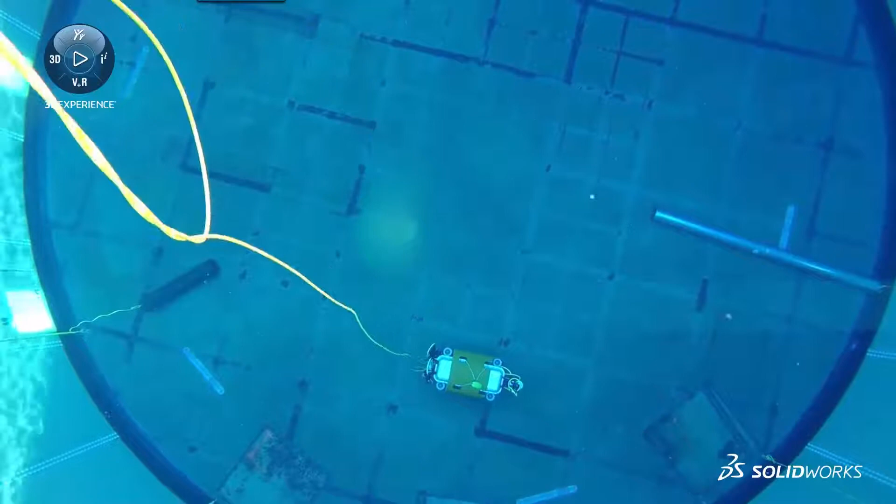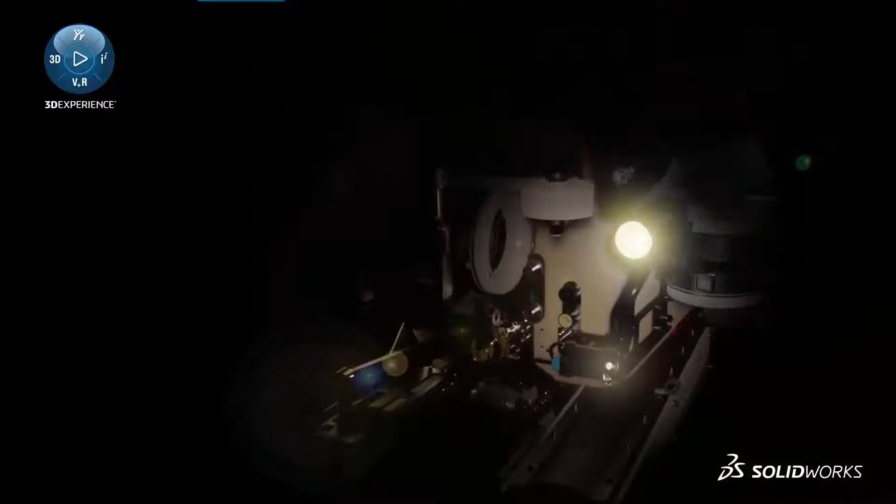By being able to use robotics for this task, they have reduced costs for their customers while improving accuracy. Their design is focused on safety and reliability for these unique environments, providing maximum uptime and allowing inspections to take place when and where humans would have to otherwise wait for the tanks to be empty.

Founded in 2016, Square Robot chose SolidWorks and eDrawings as their go-to design and management solutions. It was critical for them from the start to have the ability to work from anywhere combined with best-in-class design tools.

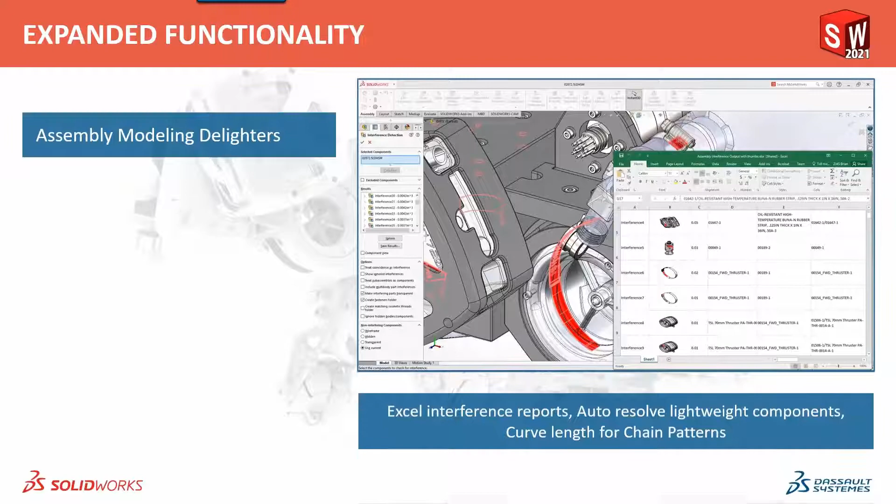When we get into large assemblies, which is just, it's not going away, right, everyone? Large assemblies is probably here to stay, and it's only going to get more intense. So we have some options that we're going to show you to defeature these models to simplify the information that we see on our screen. This is a huge issue today, so I imagine many of you will find some benefit to some of these tool sets that we've added in.

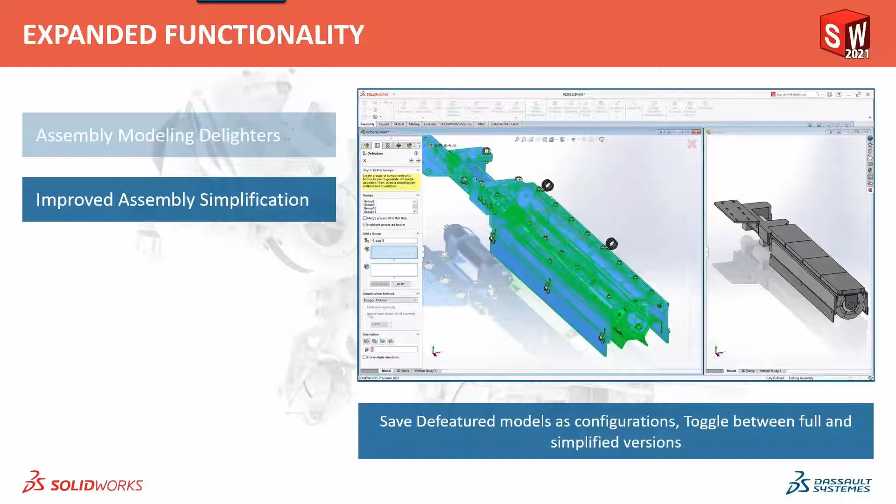When we get into sheet metal information, of course, can't forget the sheet metal people. It's a more flexible design. We have some really neat edge flange options - a lot of these things you probably could have created previous to 2021, but it would take 2, 3, or 4 functions and some real challenging brain time. Now with edge flange, we're able to just select some faces and edges and really create bends to these sheet metal components.

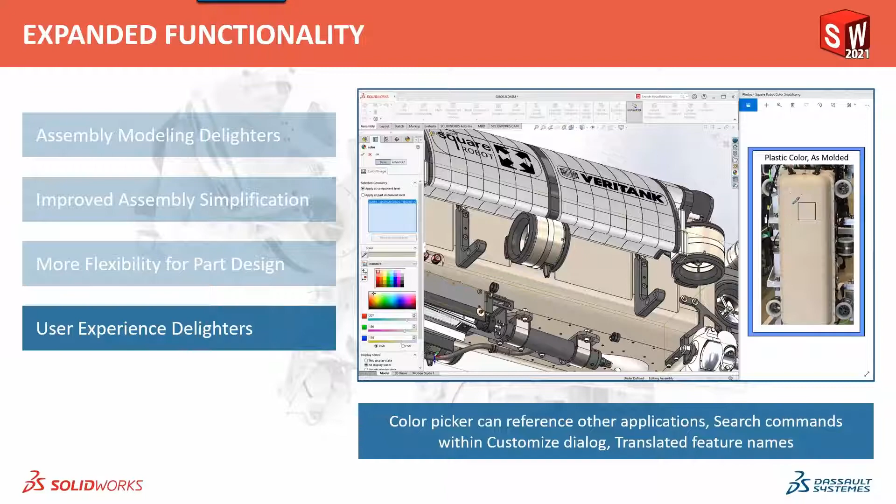As always, we have to keep you guys happy. It's not just about what we're manufacturing and how fast we get to a drawing - we're using this every day, 6-8 hours every day of our life. So Solidworks development is well aware of that, and they've added some user interface things that help us navigate through our model a little quicker. We're also going to discuss how to get coloring applied to your part. That's always important, and it's more important now than ever - we get 3D printed parts with textures associated, so we really have to tighten up our game on the aesthetic value of our models as much as the modeling itself.

One of my favorite things added this year is an improved mesher. We talk about meshing when we talk about simulation - Robbie Hoyler is going to take you through this a little more in depth. For those of you doing simulation, I think you'll find it to be an awesome benefit, and I'm really looking forward to having this capability.

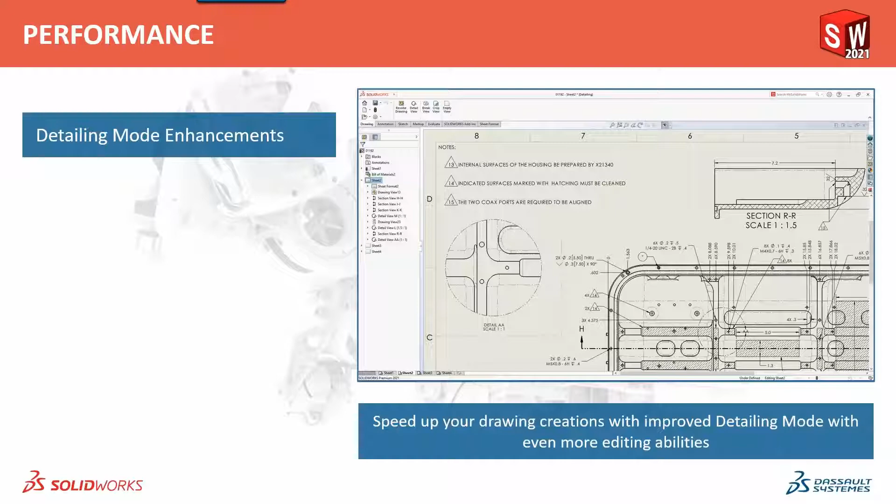So that's kind of our overview on the functionality. The next thing is performance. It ties into those large assemblies I mentioned earlier, but we can't forget our drawings - these detailed drawings aren't getting simpler or easier, less information, they're getting more complex. So we have some options to get us into these drawings a little quicker, get us working a little quicker while this is calculating in the background.

We have some options here for simple things like zooming and panning - things we do a gazillion times an hour. But a lot of us, when we get into these higher level assemblies with all this geometry on screen, things can start to hiccup a little bit. Although we deal with it, it is frustrating. So we have some options to show you that make this a little smoother, a little easier to use on an hourly basis.

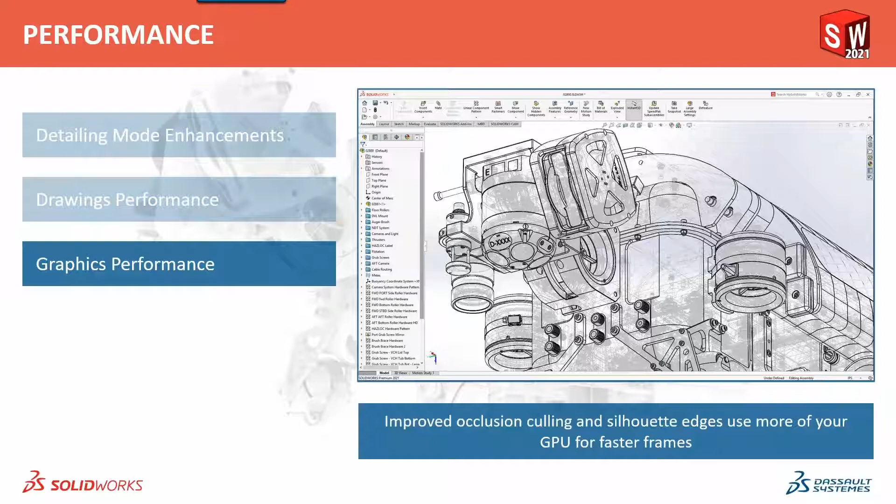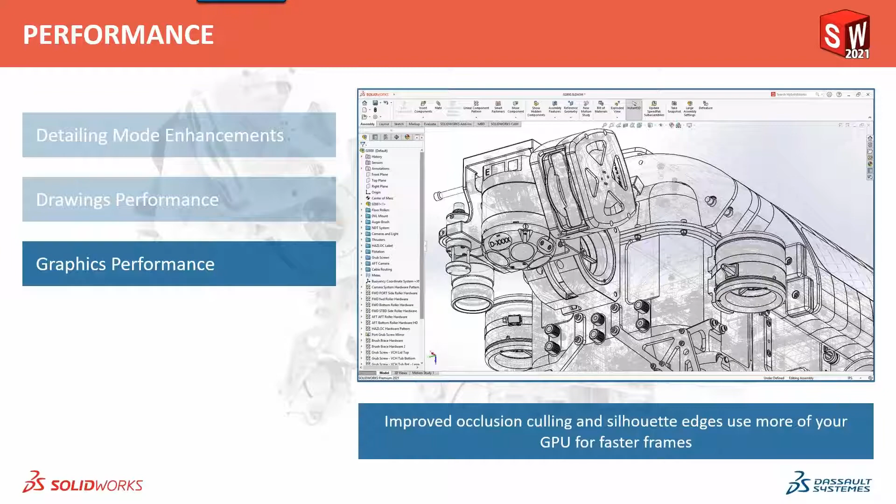When we get into graphics, which is always a topic of conversation at every new release - things aren't getting simpler, we're getting into more assembly manuals and instruction manuals. Our processes have changed, our 3D models are utilized differently, and we need this level of graphical representation. We've always wanted it and could get it, but we might be dealing with slow rendering times, or you might not want to rotate that model because you know it's going to take a while. We've got to get away from that and be able to do our job. So we've added tools that help us calculate some of that geometry quicker and get you into those assembly and instruction manuals we're really trying to capture.

In assembly performance, we're going to talk about lightweight mode and how we've increased functionality within that. There are some really neat things you can do with that, along with coupling it with a defeatured model or a silhouette model. We're taking several tools and combining them together as we usually do - it's not just one tool that gets the job done, but we combine a few tools to get us what we need.

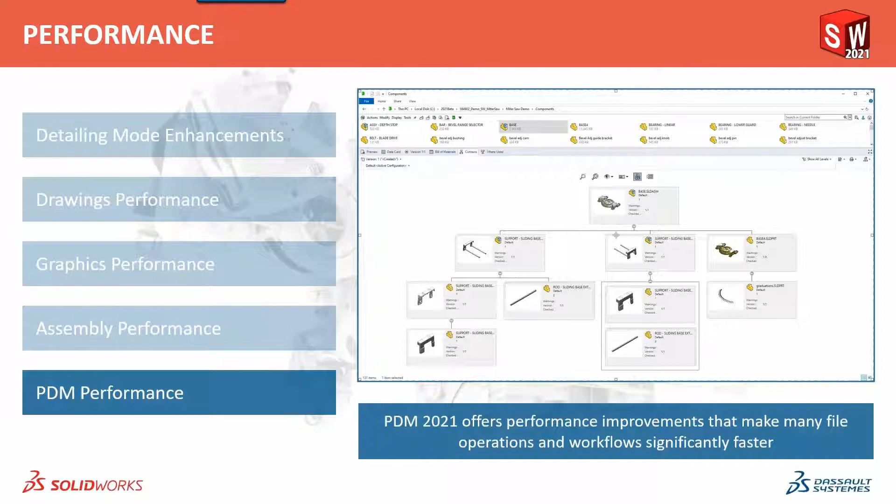And how can we talk about any of this without discussing how it interacts with PDM? Mike DeConing is going to have a follow-up presentation a little later today, and he'll get into the weeds on this. But in 2021, I am seeing that I can check in and out files quicker, guys. I don't know what more to tell you. Mike will have the details, but I know it's working faster, and that's a good thing because we utilize that quite a bit.

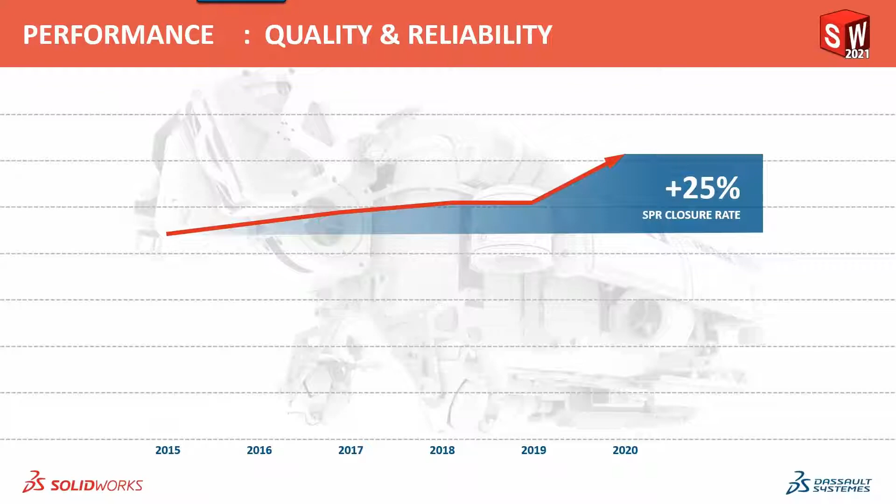Some of the things they addressed were some of these SPRs. I'm sure many of you on the phone have published one or two of these in your days. SPRs are things we find, kind of like bugs in the program, that need to be addressed. No one's perfect, and SolidWorks requires us to identify some of this, but they address it. They're not only addressing really simple things, they're getting into some of the really complex, harder items that take a little more development time. It's not just changing a color on something — these are pretty intense issues that we receive from you guys, and SolidWorks development is addressing it.

Okay, so now we're going to pop into SolidWorks 2021 in action and give you a rundown on what this all looks like. So like I said, those are the features to look for, and now we'll get you into the software so you actually know where these picks and clicks take place.

So the first demonstration, we're going to go through the quick access toolbar. We have a new method to customize your interface, and a collapsible command manager to look for. When you're customizing your interface, we have an option now to search for this information, which is very helpful because we have a very feature-rich application, so finding things can be somewhat difficult. So searching is a great option.

We have some improvements to color, as I mentioned earlier. It's important, so we have to be able to apply these colors and textures. We've added some functions there, and we have an option to redo part features, guys. So if you ever get the itchy trigger finger like I do and you go a little too far back, and you're like, oh no — we're going to be able to redo that.

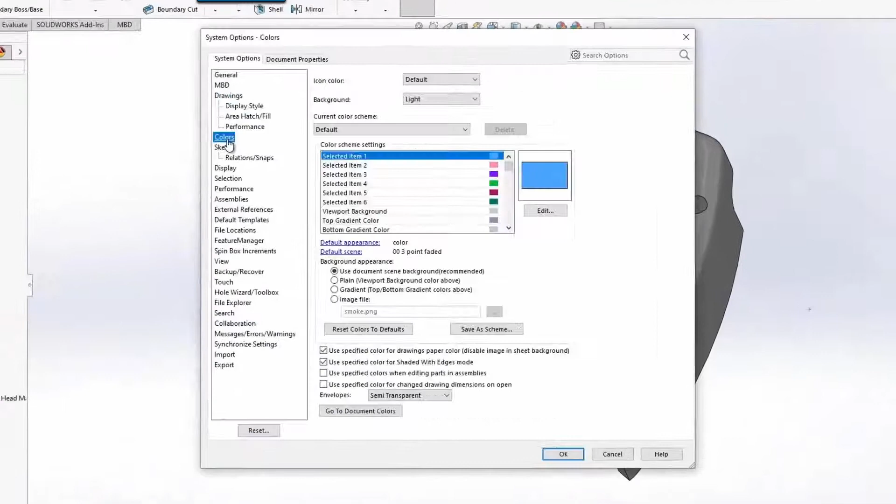To complete this part, we need to cut and pattern a sketch. However, the sketch and the part color are similar. Changing these color settings has always been available, but in SolidWorks 2021, a column of representative colors is shown, making it easy to find the item you want to change.

Let's use this green color to make the sketches more visible.

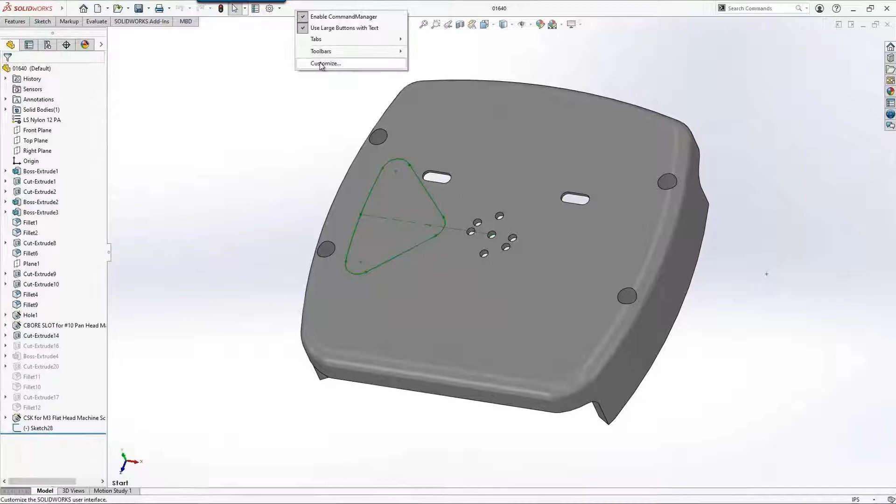Also new in SolidWorks 2021 is the ability to collapse the command manager, allowing you to reclaim as much screen real estate as possible. Moving the quick access tools to the command manager further reduces extraneous icons and helps you focus on your design. All tools using the tabs across the screen are still available.

But a faster way to work is to use the S key, as we all know. However, it doesn't yet have a pattern command that we need. No problem, we need to add this in. We can drag and drop that, but how would we find it? The search option is a convenient way to locate any functions you're looking for within the SolidWorks interface.

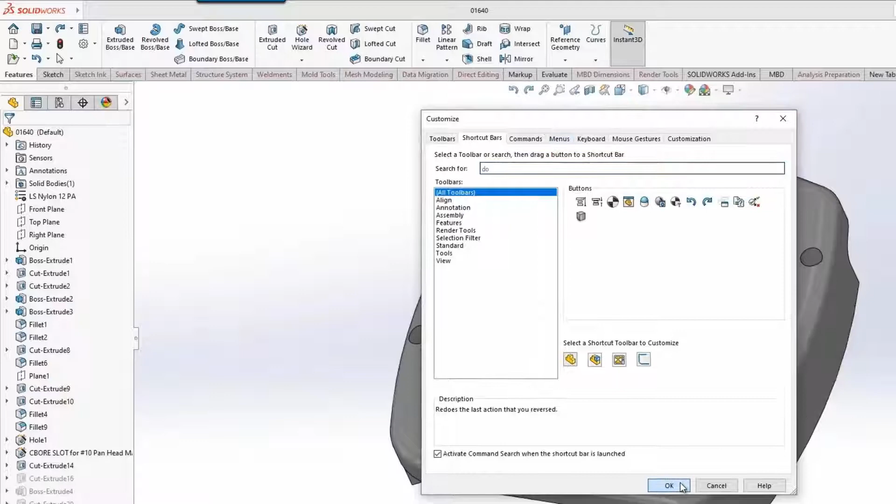Now that we've set up the shortcut bar, finishing our design is trivial. Notice how just drag and dropping these gives us what we need.

Finishing our design is a simple right click. We have access to certain functions that we use readily in SolidWorks. As mentioned earlier, our undo option is available, but when we get that itchy trigger finger and go too far back, we now have the function to redo. Not everything can be redone, but most of our tool sets have the option to go forward and redo, so if you accidentally undo, you won't have to spend extra time. Small things, but ones we run into quite a bit.

Just to recap, we took a look at that access bar, we had the command manager, and we're able to search on our tools now. We're going to look at some improvements for part information, starting with sheet metal.

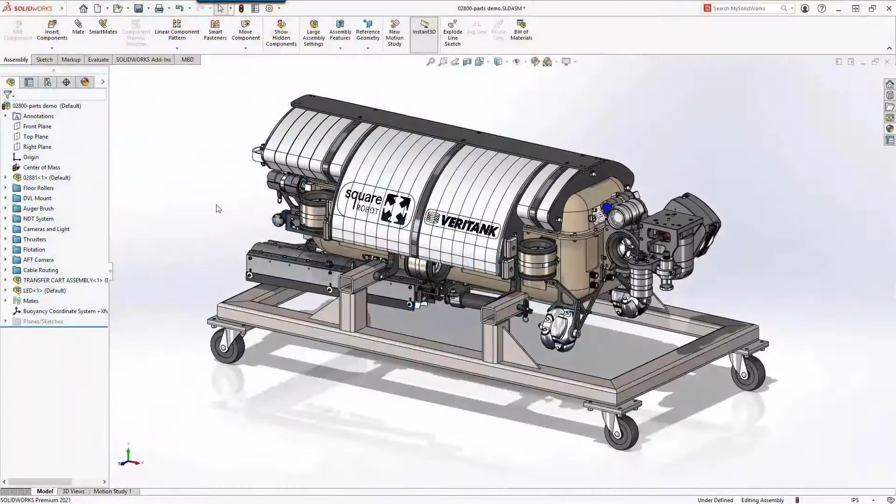Sheet metal is a big part of what our client base does. No matter what you make, usually there's a shroud, an enclosure, or some sheet metal component to it. So it's important, and we're going to discuss some of those options with the edge flange and dig into some of the new things we'll see here.

When working with sheet metal parts, we've long been able to create an edge flange on curved edges. You can see on these two examples two flanges that you could probably create previous to this release, it just might take two or three steps.

New in SOLIDWORKS 2021, edge flanges can be created on curved edges originating from non-planar faces, such as those in this bend area. The preview shows how the edge flange can be created all the way around the part.

Familiar edge flange customization tools are available to help define the edge flange, such as length, angle, dimensioning methods, and flange positions.

The new edge flange looks great and is sure to provide more stiffness to the angle bracket. Of course, the edge flange can be flattened. Ready to detail? With a simple right-click, export to DXF for fabrication.

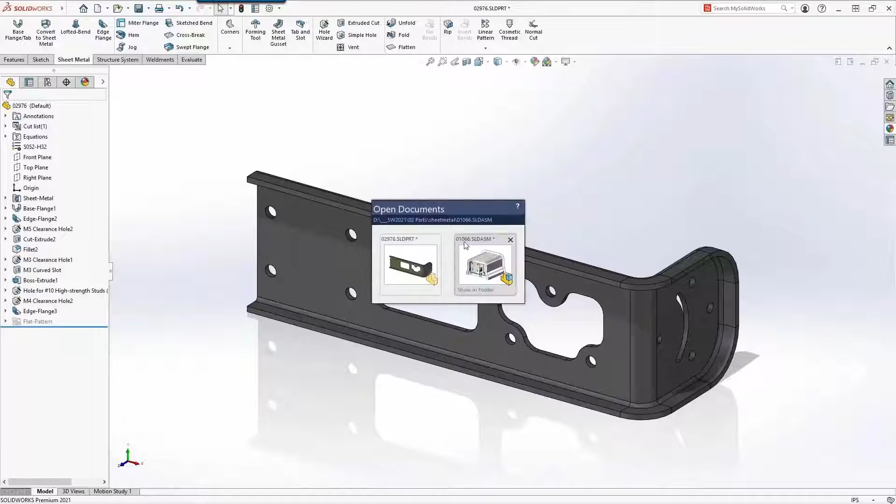This edge flange is great for structural integrity, but it's also useful for enclosures and guarding, such as this cover. The edge flange on the far side needs to protect the components of the navigational control unit. Fully editing capabilities let us change the direction of the flange as well as the angle, to wrap around the internal components and keep them safe.

The new edge flange capability along nonlinear edges extends the robust sheet metal capabilities of SOLIDWORKS 2021.

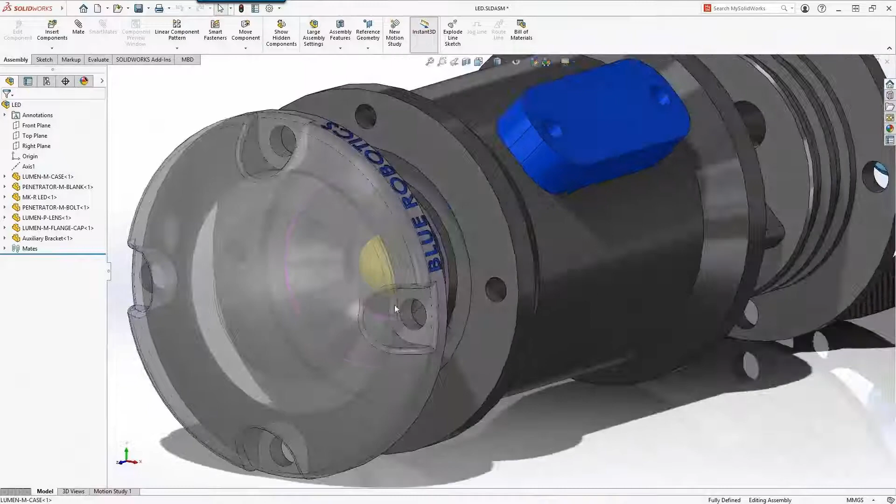.3MF files are being readily utilized in all of our additive manufacturing. This LED light assembly contains parts of various colors, applied textures, and transparency, and needs to be 3D printed. In SOLIDWORKS 2021, support for exporting and importing of 3MF files gets even better. We could do this previously, it just gets better.

Now we can add color, textures, transparency, and support on export. The information is stored in this 3MF file to be used in further manufacturing processes. When opening the 3MF file, you now support more appearances. Per facet and per vertex coloring, as well as textures and transparency, can now be visualized when importing 3MF.

Additive manufacturing continues to rise in capability and popularity, and SOLIDWORKS continues to embrace this technology.

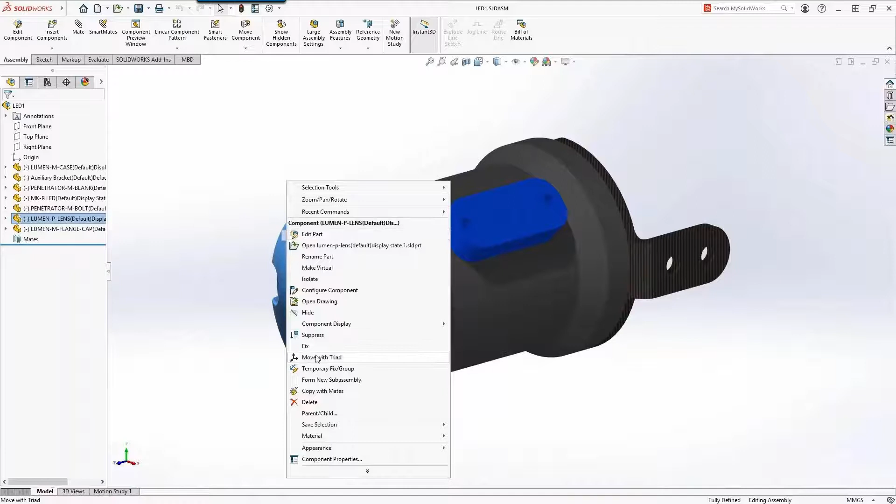Each one of these graphics bodies, with a simple right click, we get our triad, and we can delve further into these. For those who haven't dealt with this, this is a graphics body. It doesn't have all that detailed information we're used to, so I'd look at this more like a step file, though much better than a step file. It's more like that kind of geometry we're dealing with. For those who haven't gotten into this, this is where we're heading.

Please look into this and get yourself up to speed on how a 3MF file could possibly change the way you're doing some of your workflows.

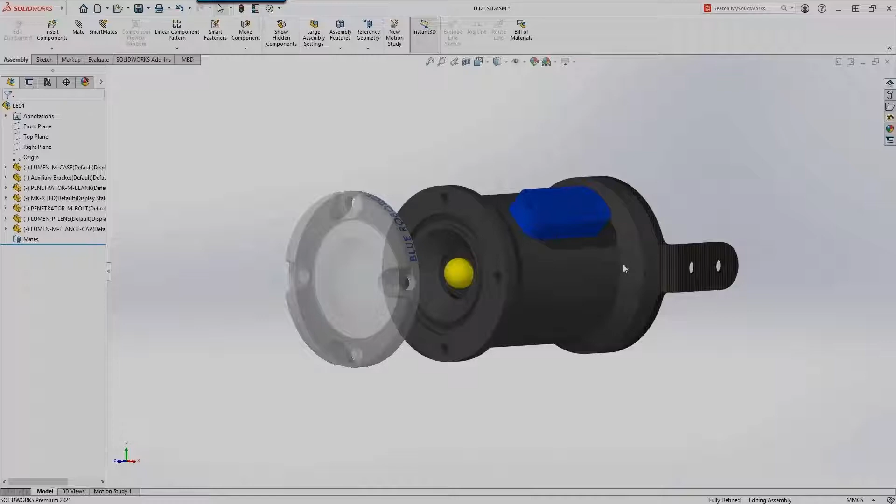When working in the Weldment environment, it's common to use various sizes of Weldment members. The horizontal tubes in this weld frame are 2x2 square tubes, and the vertical tubes are 3x2. The Weldment Trim Extend tool is used to trim the tubes to each other.

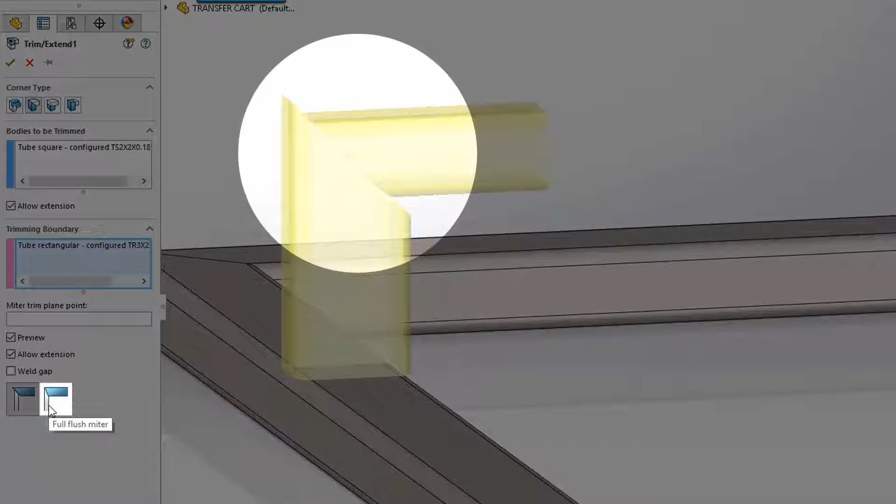Of course, we have all of our options there for handling that, but that's not what's new. This would be the effect we'd get prior to 2021. In SOLIDWORKS 2021, there's a new option for miter trims.

The full flush miter does just that. It trims the tube so they meet flush. What a great idea, right? I can't wait to use this, whether I'm working with companies or doing trim at home. I think that's going to be a really neat option to add for our Weldment environments.

Weldment's going to need to be painted, so let's edit the appearance and choose a color. We have a wide variety of colors to choose from our color palette.

Oftentimes we need to choose a color that's specifically dictated by our customer, right? So here's a case where we have a website open, the Square Robot website. We can learn about their products and initiatives, but really what we want to gain out of this is capturing their color. Maybe we want to impress them with a quote, try to get their business, whatever it may be. We now have the capability in SolidWorks 2021 to simply go over, select that color, and drag and drop it onto our models.

For the vertical members, we went ahead and chose a different color. All this is mirrored or patterned, so you can see that that information will propagate as it would prior to 2021. It works on any image displayed on your screen, everybody. It includes colors from popular paint vendors and color system websites. Pretty neat little tool there.

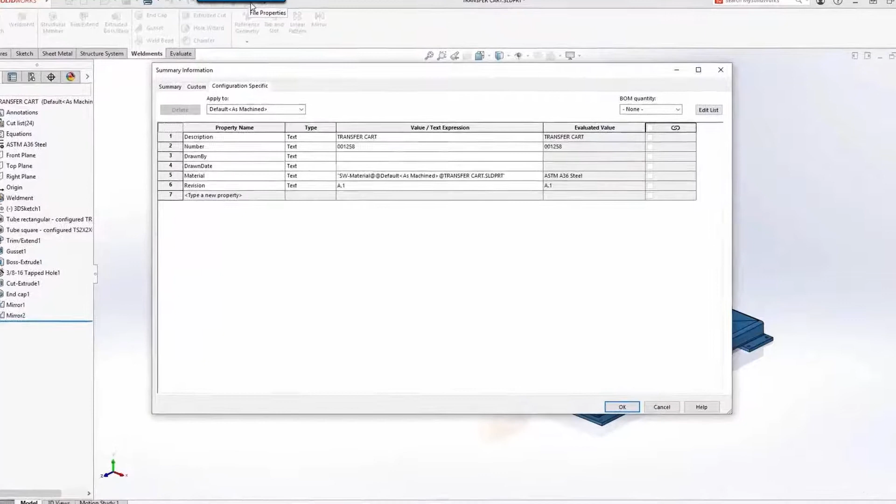The next one we're going to talk about is custom properties. Custom properties are becoming a little bit more important because we want more out of our model. We want cost, we want estimates. Custom properties are a great way to store this information: documents, descriptions, creation date, material. They can all be leveraged to automatically populate title blocks, bills of material, and PDM, as we know.

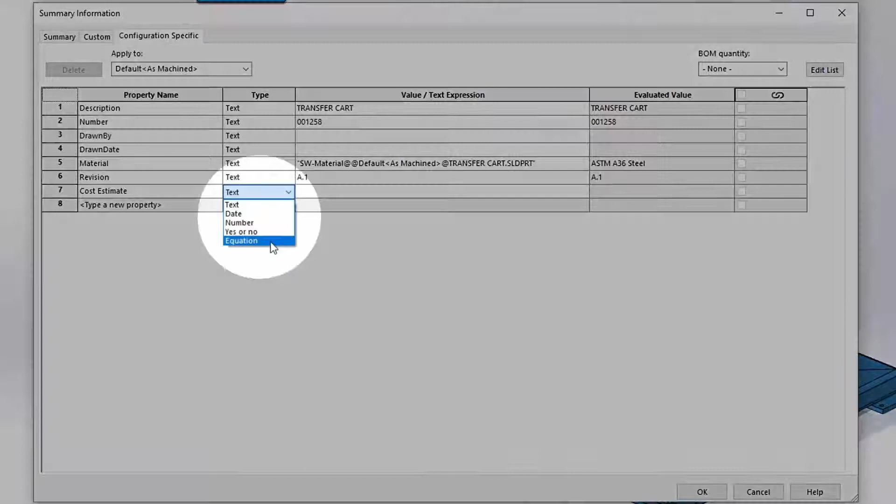Sometimes it's necessary to calculate the result and define a custom property. Now in SolidWorks 2021, equations are supported in custom properties. Choose equation as your property type, and you'll have access to all our global variables, some math functions, and other properties. For this Weldment, we want to go ahead and get an estimated cost off this, so we're going to create an equation that multiplies the mass of the part by a value, which gives us 428.

Equations can be used in cut list properties as well. This plate in the cut list is used 4 times, and we would like to know the total length of all the plates together. Again, define the property name, choose equation as the property type, and for this calculation we want to multiply the quantity of plates by the length to give us a value of 20.52.

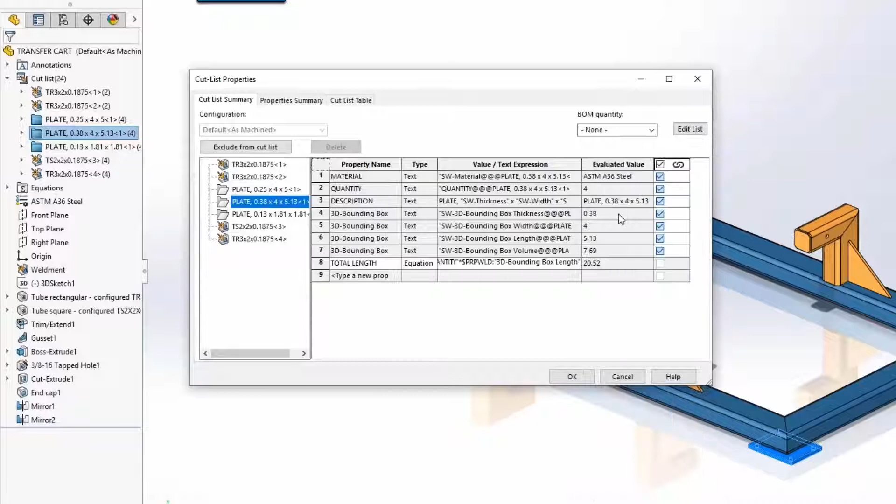So that is our new options within the parts and weldments. Again, for me, I think what we saw here in the miter area is extremely helpful. I think a lot of people are trying to do these types of cuts, and again, we're just meeting the requirement with what manufacturing is providing us these days. We're able to do fancier things, we have crazier machines out there. So SolidWorks, we have to keep up to date, and I think that these are going to do it for us. It's a really, really great tool there.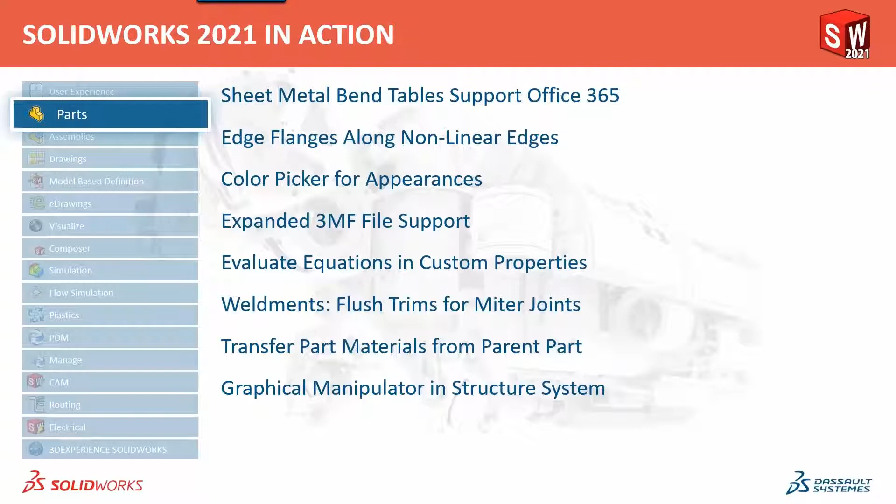So those edge flanges, color pickers, the 3MF file, the equations, don't forget those, right? That's a huge thing because we're always trying to grab something out of us. Our bosses, our managers, our customers, our supply chain, they want more. So we can build some of that automation in here. The weldments with the trims and the miter joints, awesome. And then transferring part materials, right? So good stuff in part. I hope you found it as exciting as I am.

So now let's go ahead and take a look at assemblies. Now assemblies, you can imagine that the focus, as always, is on the speed at which we can access our information and do our jobs. And nothing's really changed here. As you look through this list, we have some small things like slot mates are a little bit more automated, but the majority of the things we're going to start to see revolve around performance, lightweight components, that kind of thing, evaluating what's wrong so that we can solve the issue and get this thing working better. So I think that's what you'll get into this.

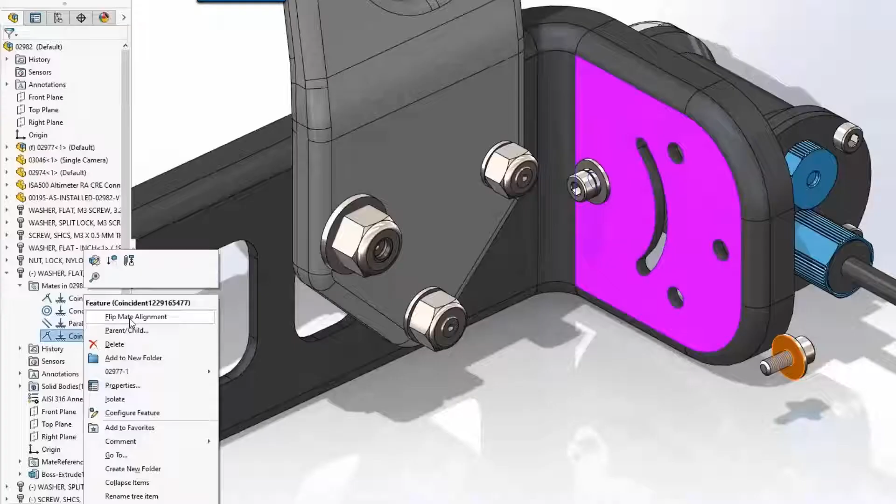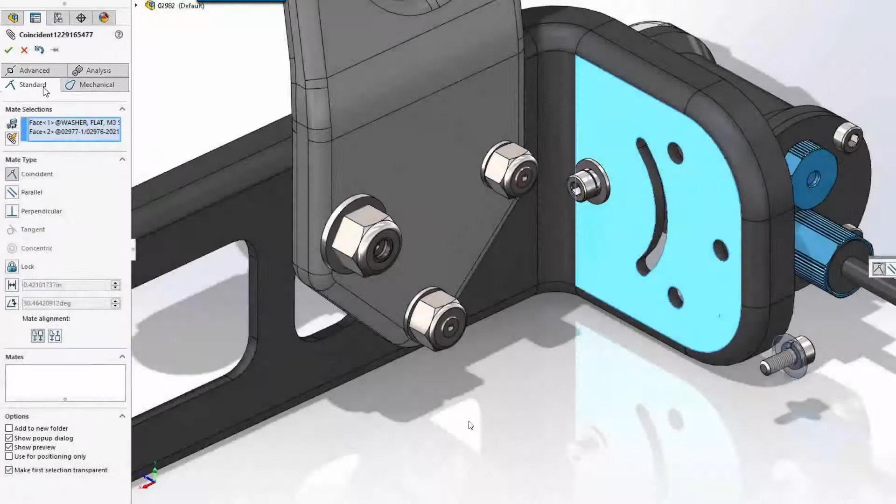Rob, I think we lost you on audio, buddy. Test. I think we got you back. Hello? There we go, we lost you on audio for a second. You're good now. Rob, I think we lost you again on audio.

What the heck is going on here? Sorry. All right, so we're going to go ahead and continue on here.

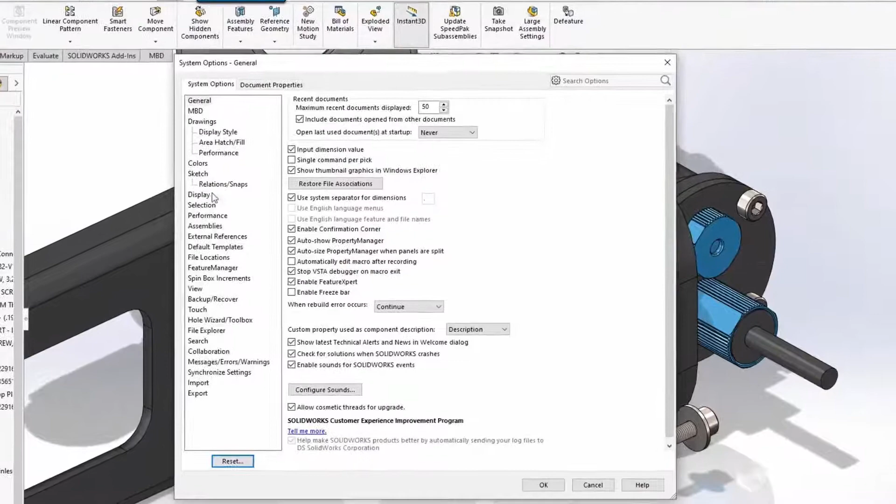We're going to look at a previously created mate in this assembly. Typically, if we were to change a mate or flip the direction it's calculated in, we'd expect quite a few things to fail. Choosing no in this case often means we have an overdefined case in our assembly, requiring additional work. Choosing yes, however, avoids this issue and instead flips the other affected mate, making the task simple. There's a lot of calculating that goes into that.

In SOLIDWORKS 2021, there's a new system option under Assemblies to always select one of these choices and retain that setting, rather than prompting each time. When flipping mates from one direction to another, there's a lot going on, so we give you the option to go into system options and define how this adjusts flip mates. This could save time, especially if you do a lot of flipping fasteners. The default flip alignment is now your option.

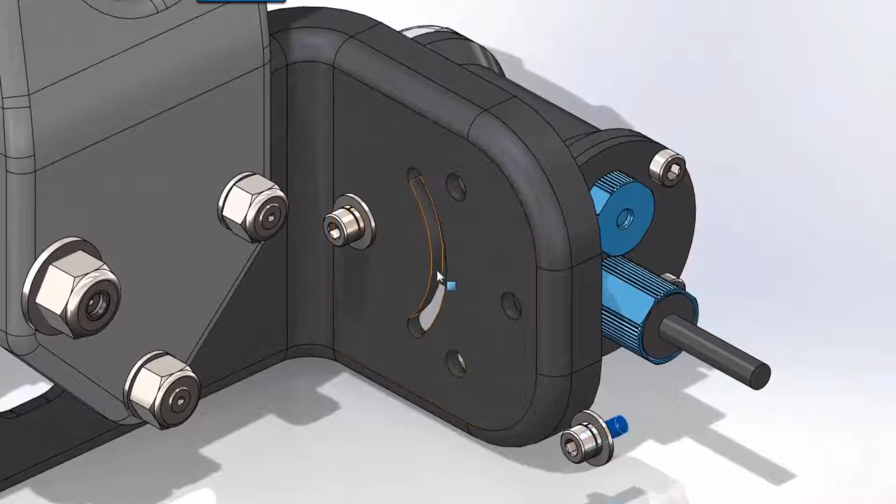When creating mates in slots, which we sometimes do, in SOLIDWORKS 2021 you can now choose the default type and position. In this example, center of the slot has been selected as the default choice.

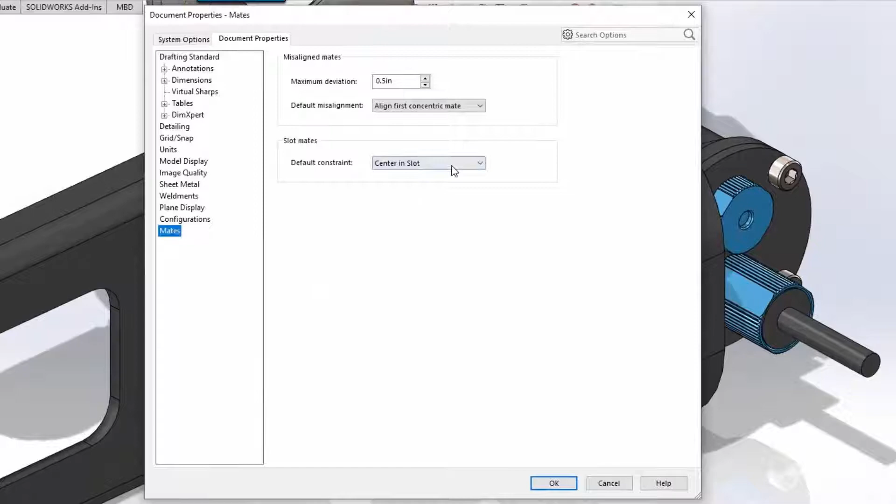Likewise, there is now the option to lock rotation of slot mates, similar to concentric mates. The default slot mate location is a new document setting found under mates. This eliminates the need to regularly change the location type when adding new slot mates, saving time and possibly preventing you from accidentally choosing the wrong constraint.

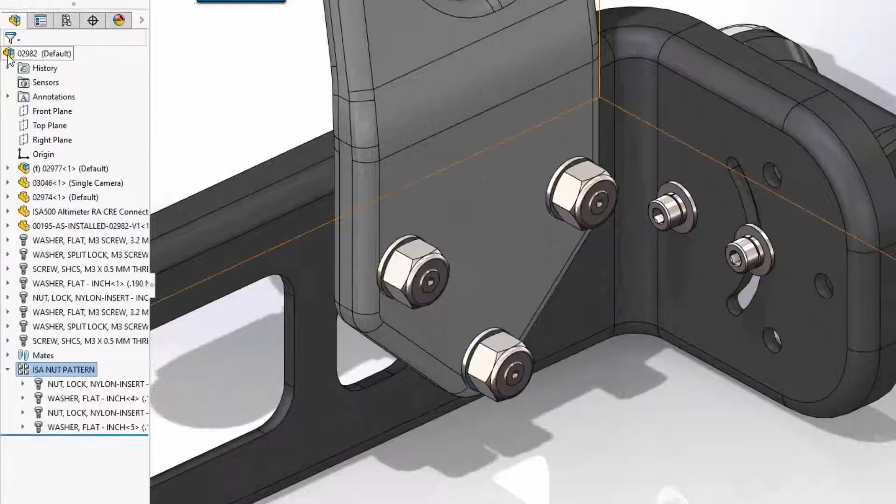SOLIDWORKS has always offered the flexibility to change the configuration of each component within an instance of a pattern. However, sometimes you may want to change all components to reference the original instance, which is time consuming. In SOLIDWORKS 2021, a new option to synchronize the configurations of all component instances created by the pattern is now available. This also helps prevent inadvertently changing the configuration of any components from the quick menu dropdown.

And by locking this option within the component properties dialog, this ensures that as you make any configuration changes to the seed, those changes will be propagated automatically and predictably.

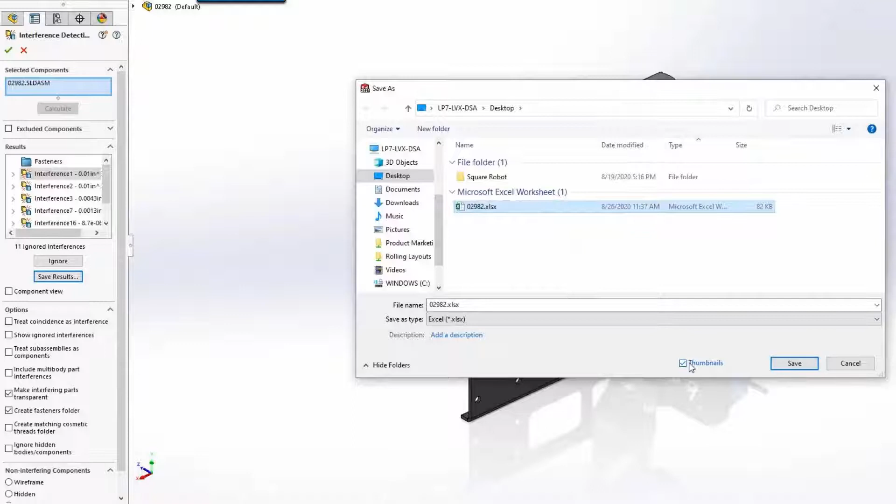Finally, interference detection is a powerful tool to quickly find issues within your designs. SOLIDWORKS 2021 now offers the option to save these interferences out to a spreadsheet through the Save Results button. You even have the choice to capture a screenshot of each interference so they can be shared and reviewed by others in your organization. This offers a new collaborative way to review interferences in design and determine if they are intentional due to fit conditions or not.

I think some of these tools really fall into where we're going with model-based definition information. We're trying to tighten up our workflows. Here's a case where we can now communicate very easily downstream or upstream the issues we found while doing our job. I think this is a bit of a change to your design cycle and how you work, so I challenge you to think about how you could leverage exporting your interferences to an Excel sheet that you can bring up in a design review meeting, since that may involve other people.

All right, so we're going to get into assemblies now.

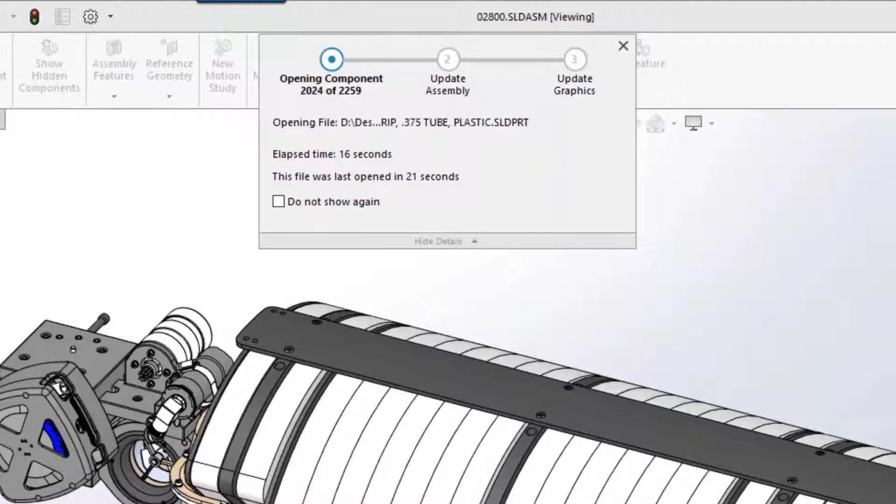You can see here we have a fairly large assembly that normally takes quite a bit of time to open. It's a 2,200 part assembly. In this case, it took 21 seconds to open — not too bad, right? None of this is run on a flux capacitor of 1.21 gigawatts; these are just machines we have access to these days. So you can see there's a bit of speed up time there.

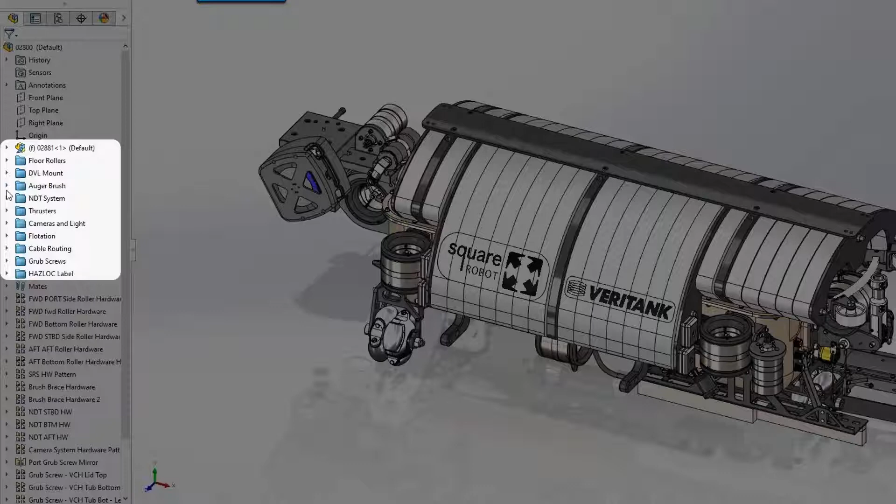To improve working with lightweight components, there is a new, more streamlined approach to accessing assembly and feature information. Simply expand a component from the feature tree, and you can dynamically load these components in place. This prevents unnecessary loading of large assemblies but allows you quicker access.

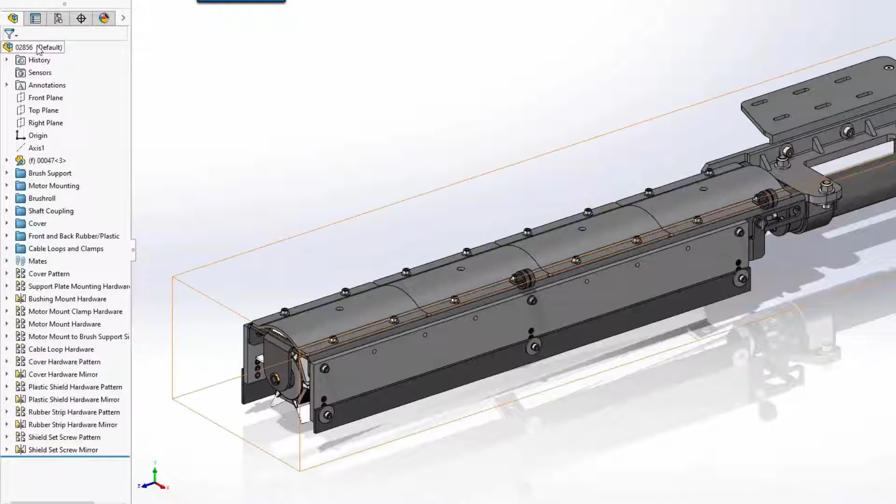This is another big one. What good is using this simplified information if changing over from one to the other takes forever? Well, in SolidWorks 2021, we've addressed that as well. Configurations now load much faster, so switching between the created configuration and others is significantly faster.

The Performance Eval tool within SolidWorks has always been an invaluable resource to give insight into areas of a design that may cause performance degradation. I hope you guys are using performance evaluation. For those of you that aren't, please do. We've now added in a really neat tool.

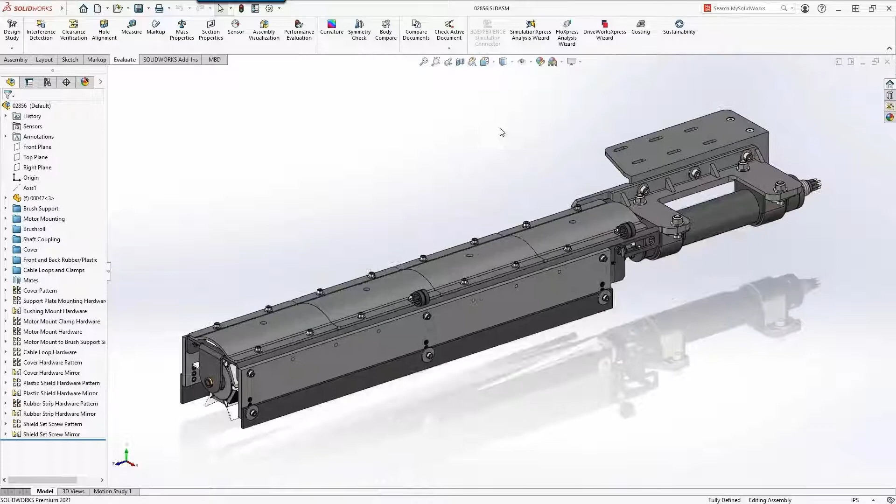New in SolidWorks 2021 is the capability to report circular references from within the assembly. In this case, two holes on two separate parts have been found to refer to one another. You can use this information to further investigate the design and determine how these holes are referencing one another to fix these issues.

In this scenario, one of the components listed in the report contains a hole wizard feature, where its location sketch's center points are referring to edges of a hole that is adjacent to the part located concentrically behind them. This is a common top-down design practice to ensure the holes always remain aligned together.

However, investigation into our second component, there's also a hole wizard feature, and it appears that the center points have been referred to the same edges from the previous part.

Once we have resolved our issues from the circular reference, we're going to jump into defeaturing the assembly. Now this is not new per se, all right?

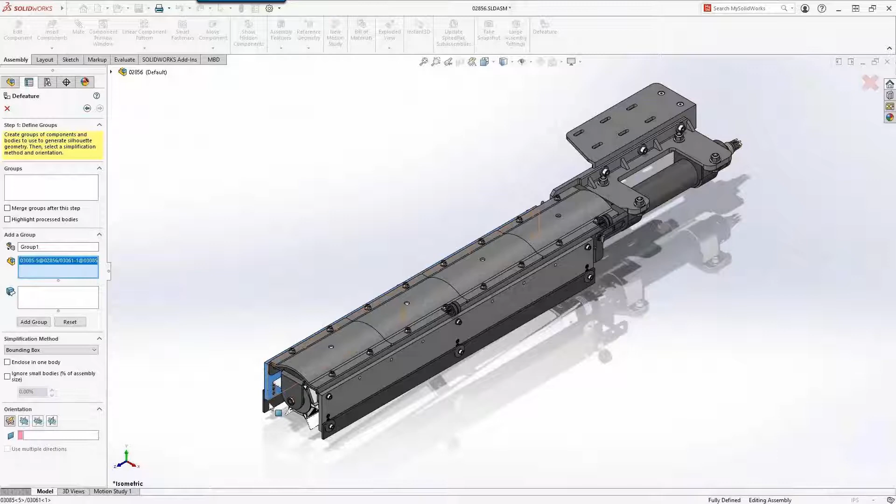We were able to do silhouette defeature in 2019. However, what is new is the capability to go in here. I'm going to add this group.

You'll see that we always have a side-by-side view so we can see exactly what's going on when we're creating this simplified representation, right? We're just selecting the faces, bodies, and edges, and then of course getting that preview on the right. This ensures that we capture the right amount of detail that we're looking for.

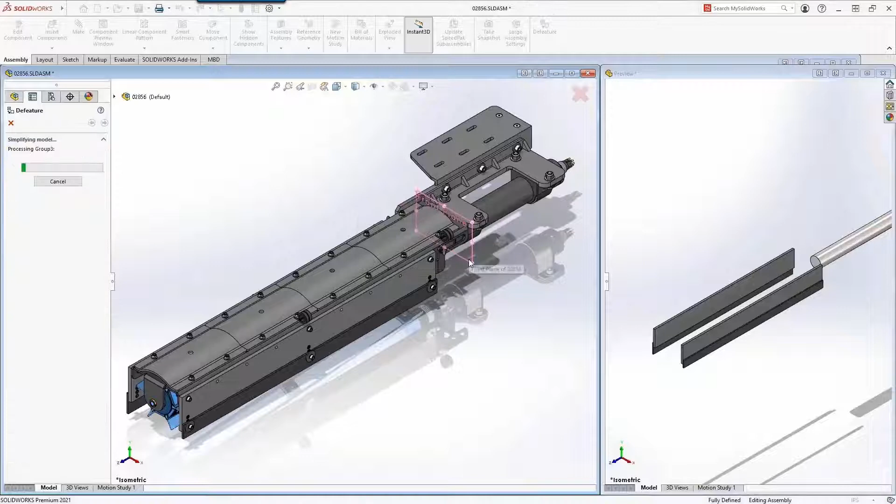The methods you can use to simplify your geometry range from something as simple as a bounding box to cylindrical representations of the components to something more complex like a polygon or tight fit model. You decide how much information is propagated to that simplified rep. Some of these components in your subassembly are critical to show - that's the idea behind a simplified rep. We move that information to the top level and omit information that's just slowing down the machine.

What's new in SolidWorks 2021 Silhouette Defeature is the ability to save the simplified rep as a configuration within the same assembly from which it was created. This eliminates the need to manage a separate file that contains the simplified model.

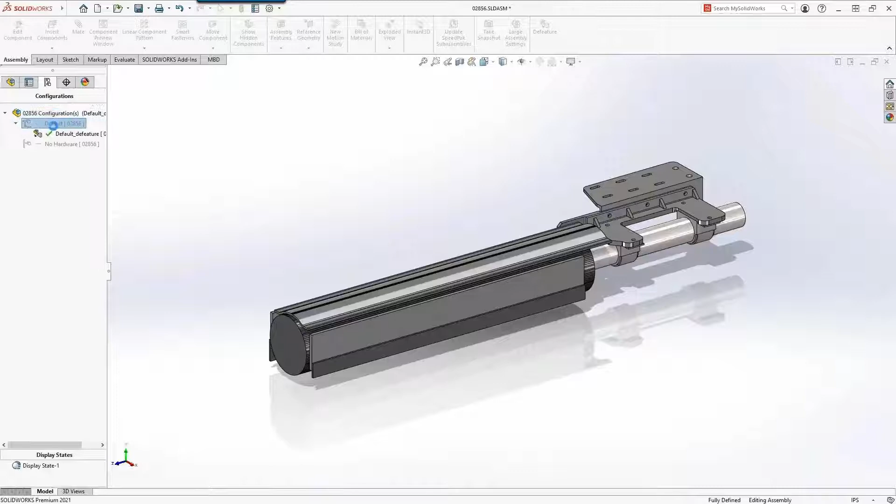You may still want to use other methods when creating silhouette defeature to remove proprietary information and share this outside of your organization.

When using defeatured models with higher level assemblies, it's now as simple as right-clicking on our component and choosing the defeatured version. Defeatured assemblies as configurations provide a way to both simplify complex assembly visually and also add a performance boost in cases where all detail of the individual components isn't necessary.

With these new performance enhancements in SolidWorks 2021, you'll be able to work faster and more efficiently with large and more complex designs. I know a lot of you on this call are having issues with your large assemblies, and I would hope that you would take a look at this.

We're going to continue with graphics information. Graphics performance introduced in 2019 changed how graphics was handled by SolidWorks, right? This has always been something we've looked at. We added in this enhanced graphics performance option. This may be new to you, but that's not necessarily new in 2021. That was new in 19.

What is new in 2021 is the option that this is actually turned on by default. So this is not a setting we would have to instruct you guys in the past. So just know that enhanced graphics performance is now by default turned on. Let's take a look at what this thing does.

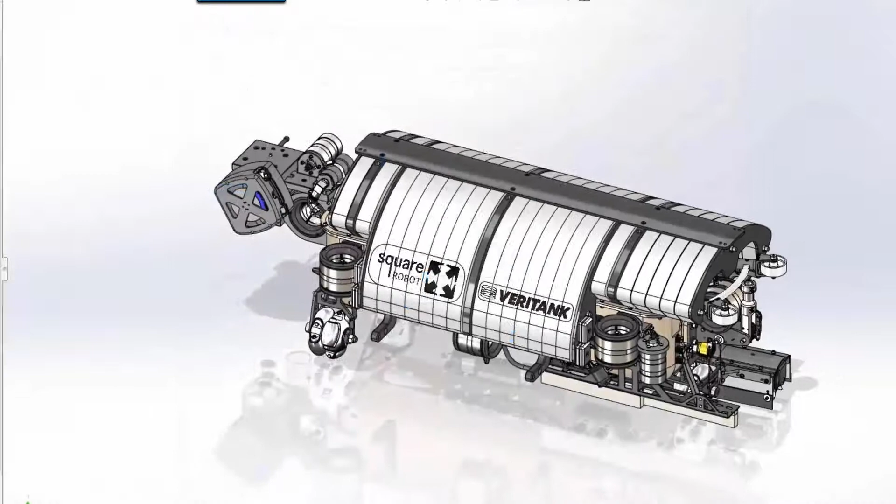So to see the difference, we will compare the setting enabled to it disabled side by side, running a macro that performs 500 mouse rotations for consistency.

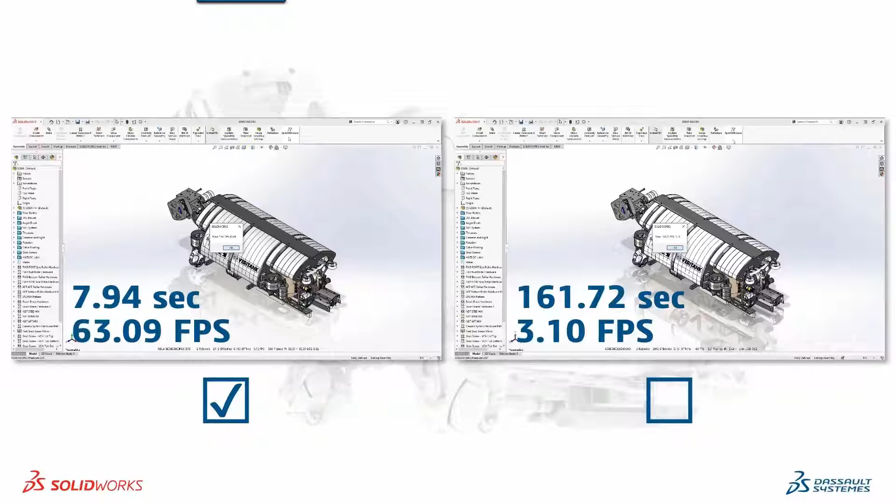It's clear the graphics performance is significantly faster on the left, but the numbers tell the real story. These actions took only 7.94 seconds and ran an average of 63 frames per second with graphics performance enabled. Meanwhile, the setting disabled took 161 seconds and an average of only 3 frames per second. That is not even in the same ballpark.

So if you're not running this, you need to be running this, right? So double check that, everybody. Make sure that if you're having any sorts of issues internally, graphics related, make sure your users and your team are enabling this. In 2021, it will be enabled by itself, but remember, prior to this, until you upgrade, that's going to need to be addressed.

All right, that was a big one, like I said. The first...

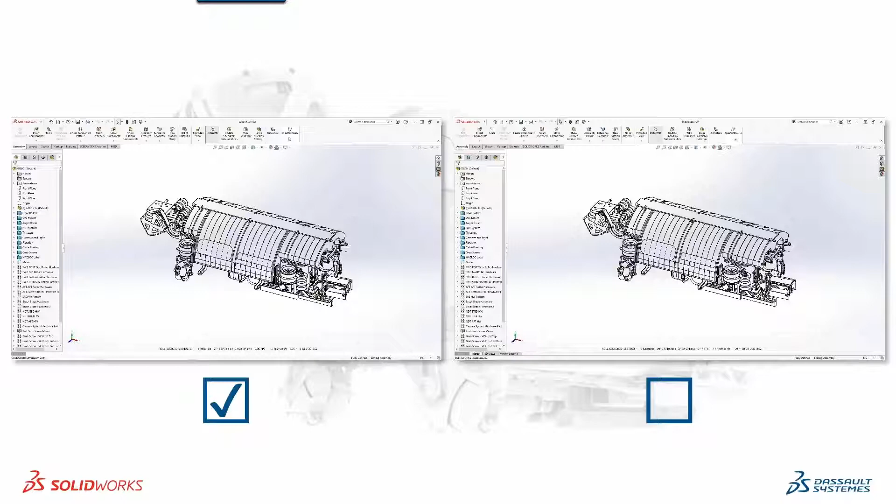Option we're going to look at here is hidden lines removed and hidden lines visible. Keep in mind, when we have hidden lines, this is a complex thing because we're having to calculate what we're not seeing. It's not just what we're seeing that's important, it's what we're not seeing that also has to be addressed. So when we get into these hidden lines, which is a pretty intense environment for us, we see that some of this performance is going to be increased.

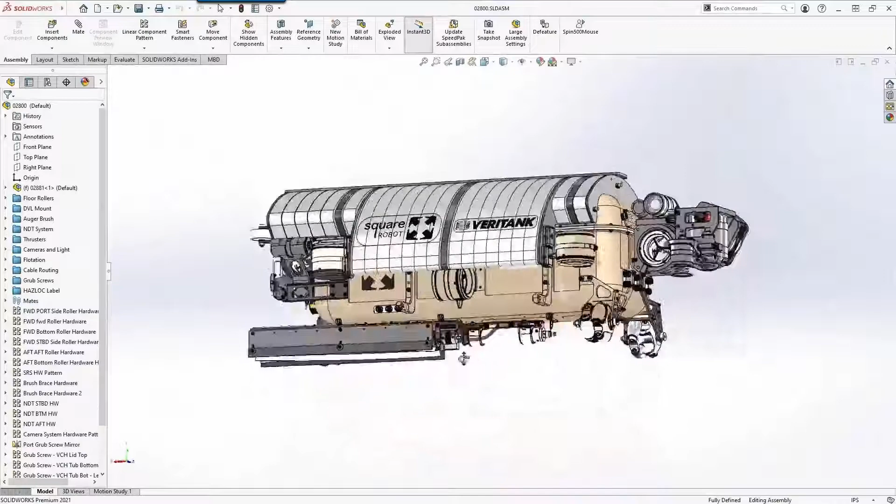We also have a second option included here, which gets a little more detailed, a little more nerdy: occlusion culling technology, as it's referred to. This isn't something we necessarily run into, but when you start getting into silhouettes and occluded geometry, this is assembly and instructional information we're trying to capture out of our model. Maybe it's internal—not something we send with the box—maybe it just tells internally how to assemble or maintain our product. These types of views are getting more important, but they also inherently have lots of hidden lines, and they're fancy. So we've got some tools, and if you're not using those, I'd encourage you to go back and make sure your enhanced graphics performance is enabled, and hopefully that will get you running. And if it's still giving you issues, give 2021 a try.

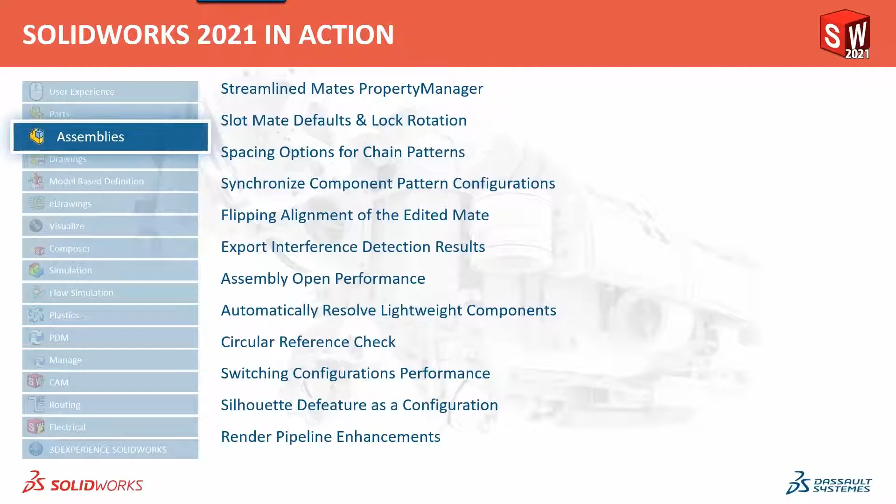All right, we're going to continue on here now into our drawings environment. Now drawings, this is where the rubber meets the road. We still know that, I still know that, we here at TPM still know that. What good is a real cool model if I can't document the design and get it manufactured? So all this information we talked about is just adding detail, adding information to our assemblies. Same thing's going to happen here in our drawings—there's a lot more information to manage.

So performance, again, has been addressed. We'll take a look at some detail mode enhancements. Now, detail mode isn't new, but we have some enhancements to it. If you're not familiar with detail mode, it came out last year. It was a great option for us to get into a drawing and start working without having it calculate. We have some options for adding relations in drawings now, so you'll see an interface much like we see in the sketch environment. There's also some little options here with the transparent dimension preview.

When you have a lot of dimensions on top of one another, it was hard to understand where we were at. So now they've given us a transparent option. And if we have any European customers, or people here in the U.S. dealing with Europe, we have some VDA inspection balloons, which is kind of important for the European industries.

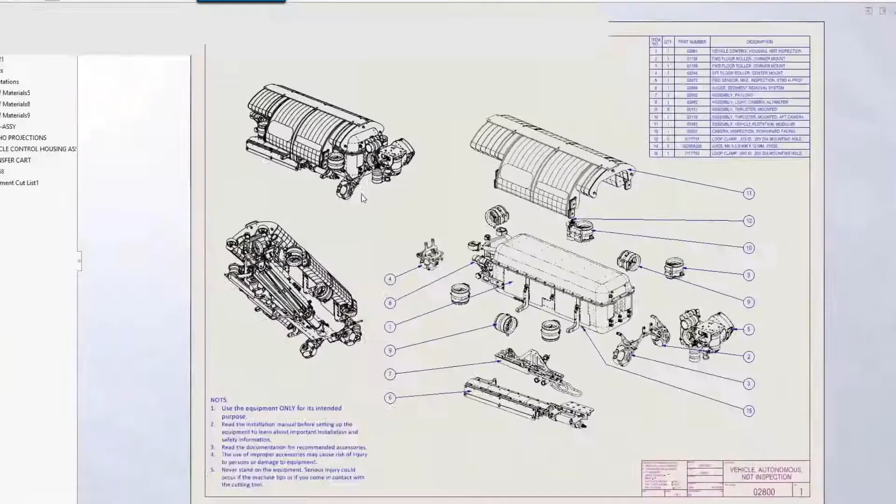So when working with large assembly drawings, view manipulation is vital to the good user experience. Over the years, Solidworks has worked hard to optimize view manipulations on the screen. Detail mode was introduced in 2020 to allow users to open massive assemblies in seconds. The enhanced graphics performance option was implemented to take advantage of high-end graphics cards by moving the graphics burden to the card. For SolidWorks 2021, the graphics mode has been extended to the drawing environment.

Oh, what happened here? Let me catch up. Oh my God, sorry. Huh. Shoot, son of a gun. My video's not playing, I apologize.

I'm going to have to explain this one through. We have the enhanced graphics option that took place, and it's now ported over to the drawing environment. It's just a speedier option—you saw it in the assembly work, the drawing environment performs the same. I hate that this video isn't playing for us, but it does show a significant increase in performance. Same thing with zooming and panning—all that information is just faster with that enhanced mode turned on.

All right, next thing we're going to talk about, again where the rubber meets the road, is the detailing environment. But aside from performance, let's talk about how we're actually going to get into... oh, son of a gun.

Well, my little videos seem to have stopped working. There we go, I think. Okay. Nope. Uh-oh, having a meltdown. Stand by, everybody.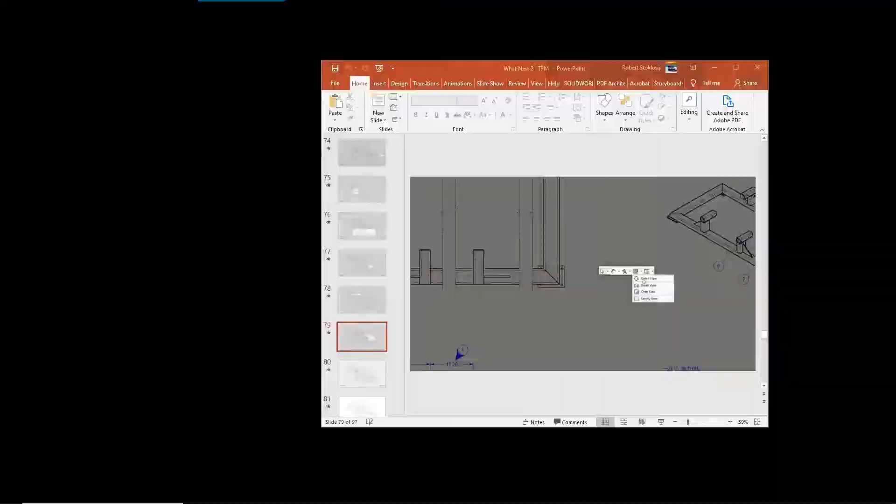Okay, I don't know what happened. It seems to be working now. I just have to reboot. You know how it goes sometimes.

So there's the zooming and panning I mentioned to you. You can see it's very fluid, moving balloons with lots of intense information. It's a pretty fluid movement now, and it wasn't in the past. It used to take a little bit of jagged motion.

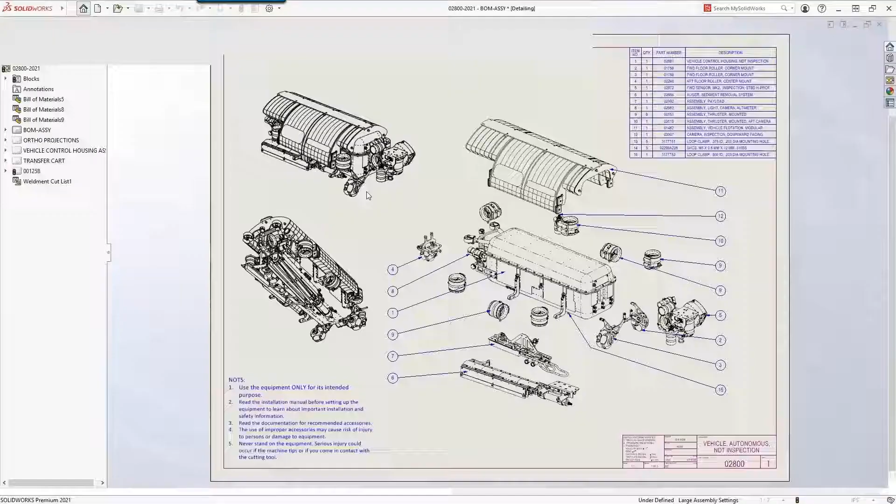Let's zoom in on some of these detailing mode enhancements for notes. Detailing mode came out earlier, but now we have the option to support, while in detailing mode, editing existing annotations such as this set of notes. That was not available before - we could get into the drawing, but we couldn't edit these. Existing notes can be edited, added, or removed, and you have full access to all of the annotation editing tools.

Balloons can be operated on, and we adjust our notes.

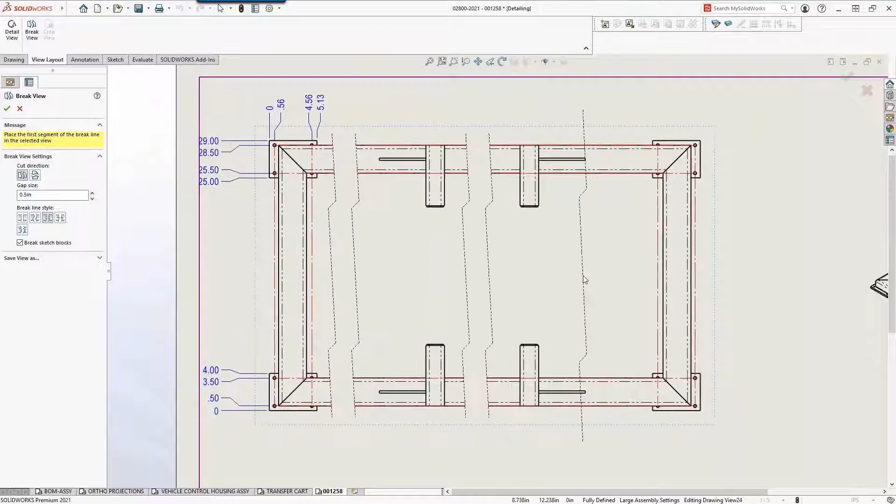Now let's take a look at the front view of this drawing. You can see we have a broken view with foreshortened dimensions to allow a more concise display - not new there, we've been able to do that. However, the top view does not have the broken views. So now detailing mode supports broken views, crop views, and even detail views. Similar to the front view, let's break the top in 3 places. All the same styles are available, as well as the gap between the lines.

Ordinate dimensions are also supported within the detail mode. We can now add additional items to existing ordinate dimensions, such as these edges and center lines. Detail views can now be created in the same manner as well.

Just like it's fully resolved - draw a detail circle, choose a sketch profile, and place the view.

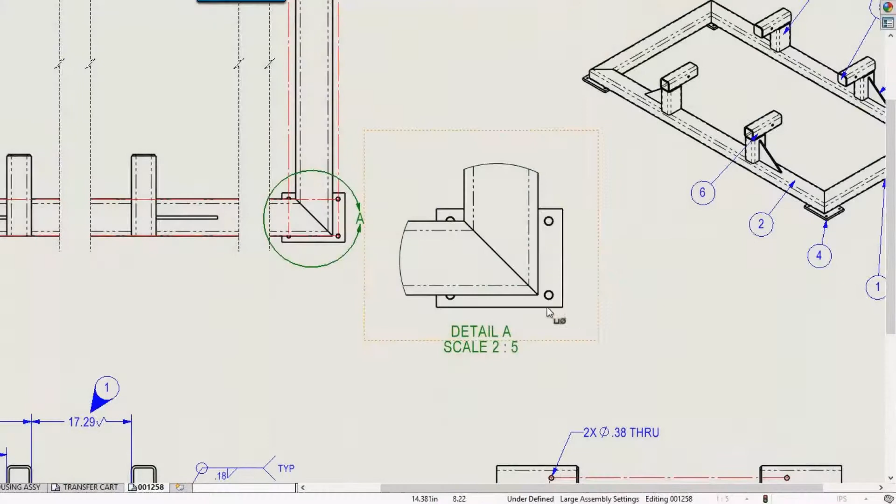When detailing drawings, it's common to define hole information. Now in SOLIDWORKS 2021, detailing mode supports hole callouts and foreshortened dimensions when required.

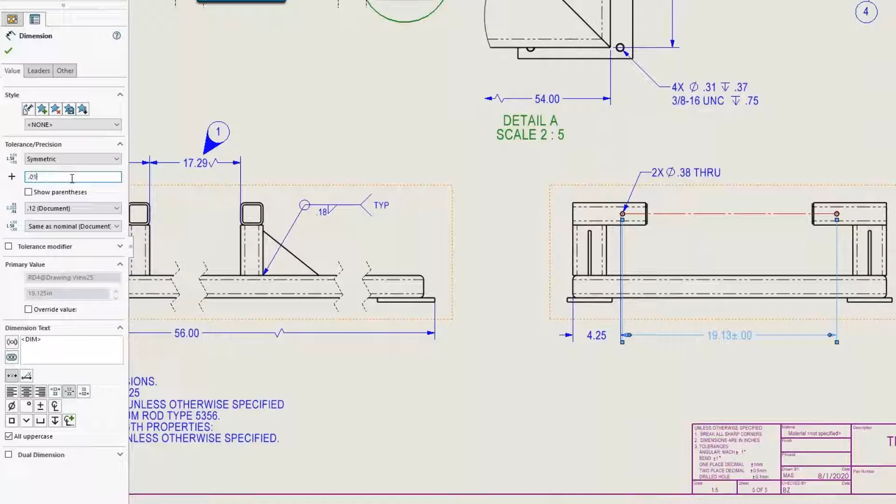Existing dimensions now have full editing capabilities. For instance, the tolerance on this dimension between the holes is an important function for the part. All dimension properties are now available, including tolerance and precision.

The location of the first hole is not properly defined by the center of the hole. All the callouts on every tab of our property manager are now available, so we can define arc conditions and dimension the extension line to wherever it's required on that particular hole.

So you can see these enhancements in 2021 extend the capability of our detailing mode to fully detail drawings in record time.

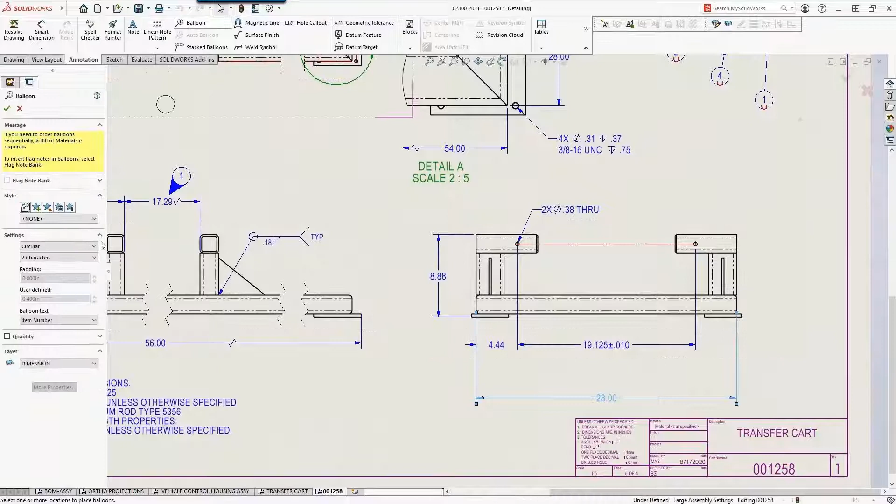VDA - this is not for everybody, but it's for somebody. VDA balloons are frequently used in the German automotive industry, so you could be part of the supply chain that has to deal with this. It's now included - a new leader type is available for VDA balloons, and it allows you to tag inspection points per VDA requirements. We can position these, and they rotate just as any other type of symbols we use. Again, to reiterate, they can be used directly by SOLIDWORKS Inspection.

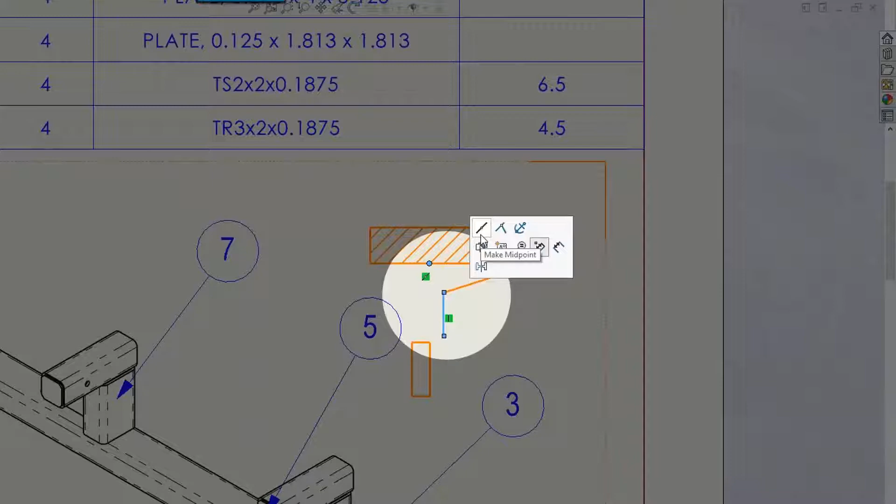The last thing we have to add here is adding in sketch geometry, or working with sketch geometry, adding relations to it within the drawing environment. This is kind of neat - we're highlighting a couple sets of entities here, and we're getting more of an interface like we'd be used to within the sketch environment. So this pop-up's going to be there. Not everything's in it, but a lot of good stuff is, so I encourage you to check that out. These are improvements to the drawing environment.

These are among some of our most popular requirements or requests from the user base. SOLIDWORKS really did a good job of taking your input and incorporating it into this upcoming release. Nothing's changed - they've been doing that since day one.

And we're down to EDrawings. Now EDrawings, this is a tool to watch out for because it was always neat and always great for communicating, but we're starting to really beef this up to the point where there's almost nothing we can't do with an EDrawings file.

EDrawings can take the place of a PDF, and it can also take the place of drawings. When you look at model-based definition, EDrawings is a critical linchpin in making that work, in getting into manufacturing. Without a robust EDrawings tool, many of the things we talk about as an industry, we wouldn't be able to achieve. EDrawings is going to make it happen.

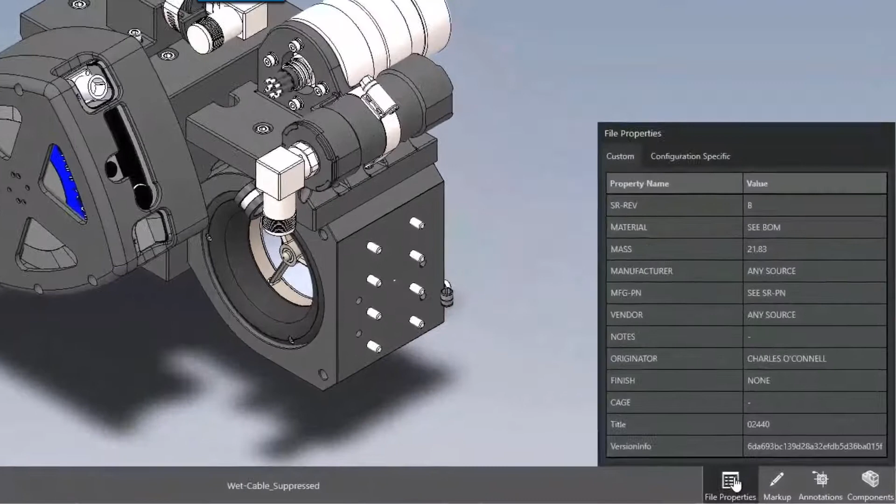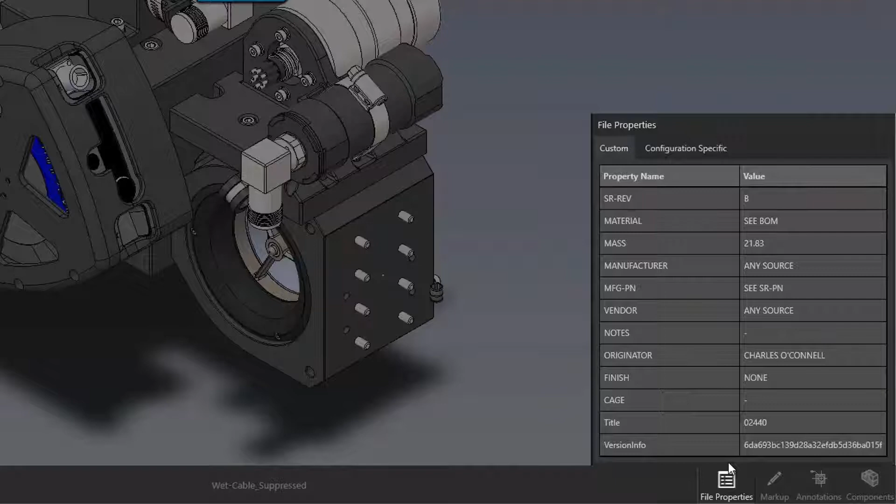In 2021, you can now view custom and configuration specific properties right inside the EDrawings Viewer. That's a big one. We want to communicate to upstream and downstream departments, and we all have different information that we need out of this EDrawings file. So we have the capability to communicate whatever is required to whoever needs it. Not everyone needs to understand Finish, but some do. Very neat tool, as well as the configurations.

Commands like measure have been significantly improved. We always had measure, but now we can measure a lot of stuff. Finding the center-to-center distance of two circular and cylindrical objects has always been available, but now you can choose to view minimum and maximum distances. We can also measure normal distance between faces and cylinders. So the selection set of how we measure has changed.

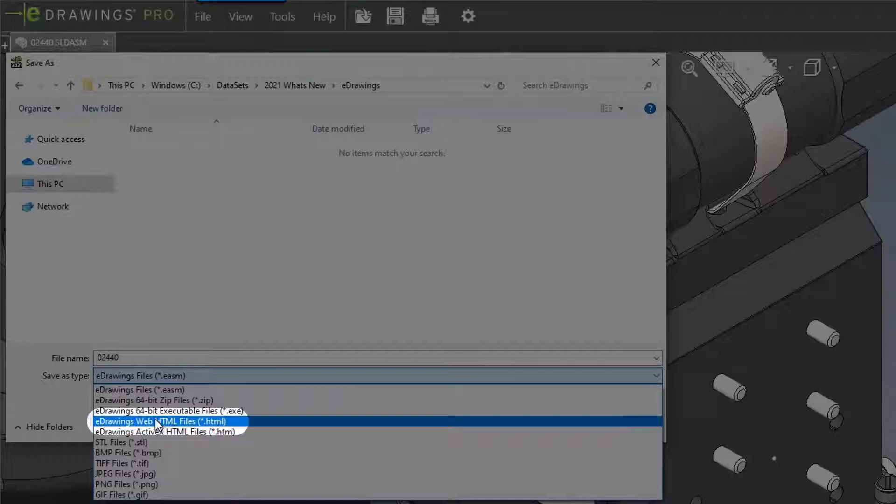Sharing 3D designs is better than ever. We do not need a requirement to install EDrawings. Simply save as a web HTML, and this can be viewed in any internet browser. Pretty cool.

This allows the recipient to pan, rotate, and zoom, as well as view configurations, exploded states, measure, and even pull the bodies around just so you can get into those little nooks and crannies to get different section information or interrogate the model however you need to. So this is a big thing. If you start to go model-based definition, or some of these other things we're talking about, this becomes an integral part of your process. This tool is making it happen.

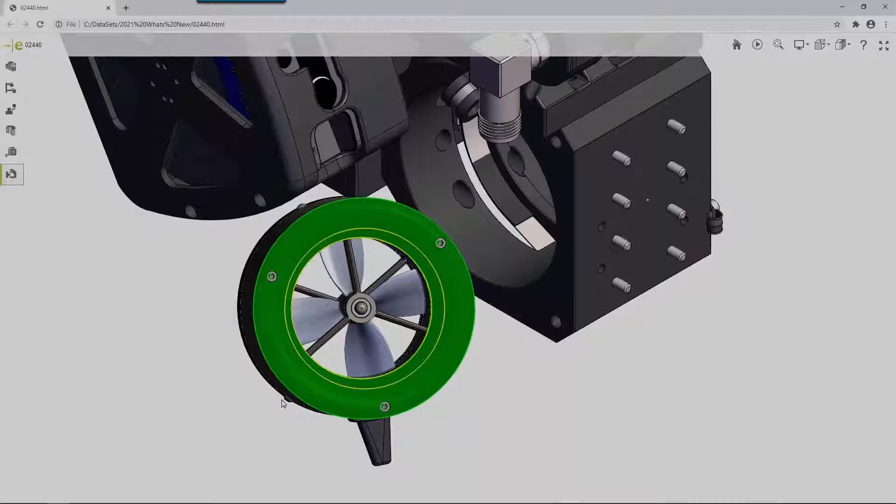Okay, so I think that actually about wraps up the what's new for 2021. I will open it up for some questions.

The only question I got here actually revolves around model-based definition. How is EDrawings used? For those of you not familiar with model-based definition, it changed, right? We no longer really detail out our drawings in the drawing environment, so we're saving this information to an EDrawings file instead. Now the idea there is that EDrawings file becomes the document almost, that becomes our drawing file that people manufacture from, quality control. So it requires a further conversation, but EDrawings is an important thing to look at. This is something we help you guys develop, it's not something that's out there already. So you probably do need a little bit of help to get this incorporated.

Silhouette defeature, yep, you can use silhouette defeature in sub-assemblies and top level. Let's see.